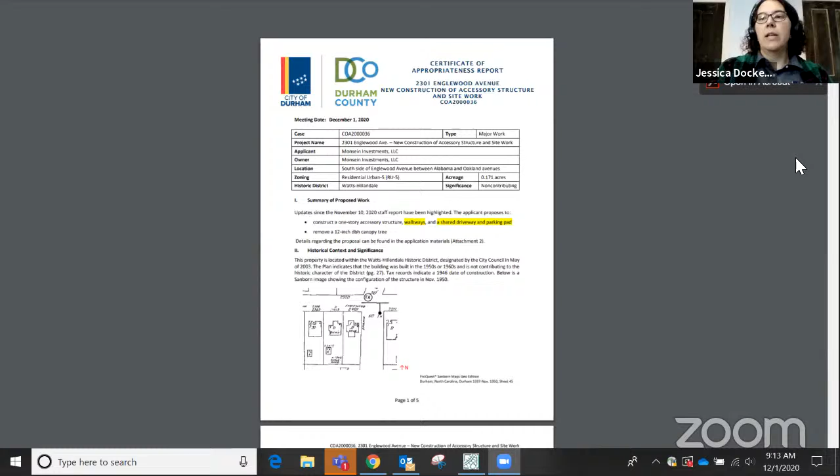And let me go ahead and share. So originally we had 2 driveways shown, and there was a question about the height difference between the original and the accessory structure buildings. So we now have 16 feet in height to the peak of the roof of the primary structure, and the accessory structure also at 16 feet to the height, the peak of the roof. And then the driveway has been altered to have 1 drive. Bear with me. So there will be 1 entrance, it will be shared by both dwellings, and these are pervious pavers in response to some concerns about the impervious surface. And I'll let the applicant add anything else.

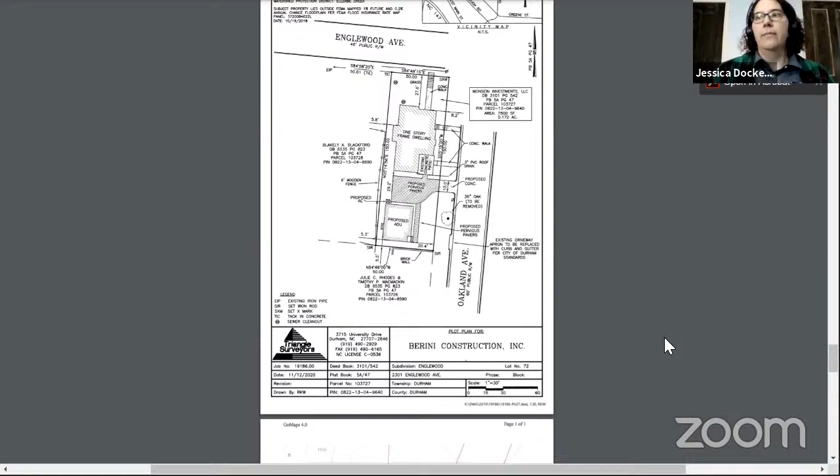This is Jeff Monsein, thank you. Yeah, so we tried to address all the concerns. We feel we lowered the roof pitch by over 3 feet, so it is now a clearly subordinate structure to the main house. That was one of the big things, and also the driveway, I think, was the other main concern. We had 2 driveway entrances, so we made 1, and then again, as Jessica stated, we were using permeable pavers to address some of the neighbors' concerns and the impervious surface question. So we feel like, with these adjustments, that hopefully the committee would approve our project.

Chair Hamilton noted they forgot to swear everybody in. It was clarified that if this is a continuation, witnesses have already been sworn in. Dawn O'Toole from the city attorney's office confirmed that for a continuation hearing, there's no need to re-swear in everyone.

Thank you, Jessica, just trying to keep things clean, appreciate it. Okay, and thank you, Mr. Monsein, for your presentation.

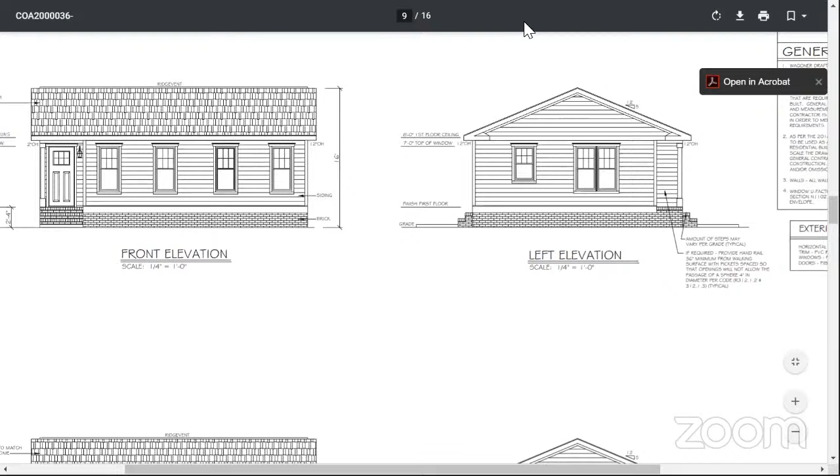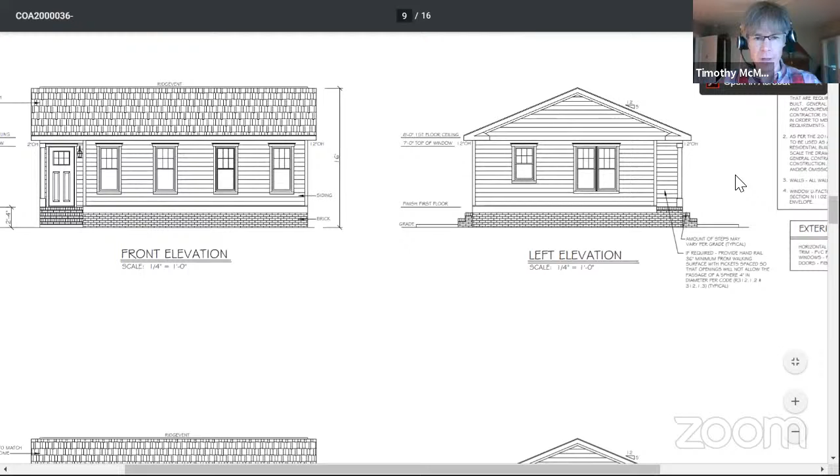I appreciate the changes in the height and in the paving. My concern is that this ADU is still very close to my side yard. Last time I showed a rule that on a corner unit, the ADU needs to be 10 feet off of the side yard or rear yard of the building. I've done some research, and that 10-foot rule did not make it into the UDO, but I'm still going to ask for additional separation here because it's a corner lot. Even though it's 5 feet off the rear of the primary structure, it's 5 feet on my side yard. My house was built in the 30s, and it's 8 feet from the house to the property line. So I'm going to ask for 8 feet separation there so the houses aren't packed in like sardines. That's all I can ask, just the separation for the comfort and aesthetics of the neighborhood.

Thank you, Mr. McMackin. Do you have any way of framing that in regards to the criteria for the Historic Preservation Commission? Nothing specific, except the character of the neighborhood.

Mr. Monsein, do you have any way you'd like to address that? Yeah, I mean, we're going to stick with the UDO and the building codes. I don't really see any options to make any further separation. We're going to do everything through the permitting office. The site, when you do these ADUs, as most of you know, the city is trying to get more density and more diversity of housing with the expanding housing choices. So when you do them, the site is already tight enough, and that's why they made the setbacks what they did. I really don't see any option of expanding from a 5-foot setback to an 8-foot setback. It won't work with pretty much any of these projects that come to the board. These sites are already tight enough. But we will do everything within the parameters of the city planning department.

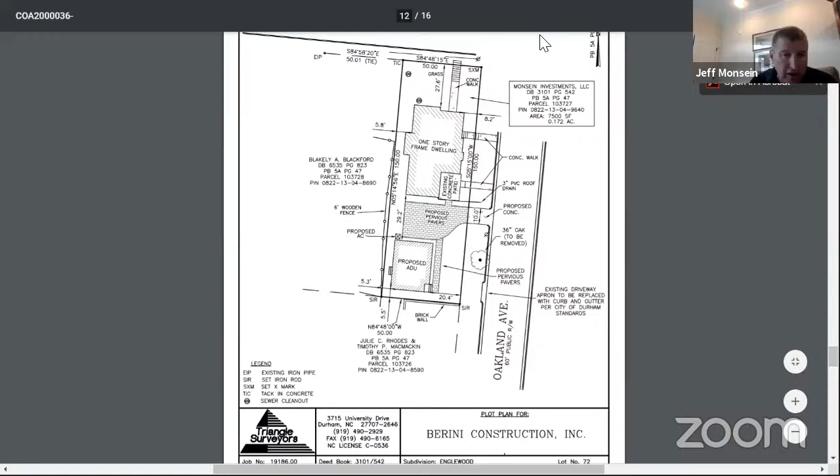Okay, thank you, Mr. Monsein. Are there any commissioners who have questions or issues they'd like to discuss with the applicant or the opponent?

Quick question. I think I'm remembering that there was going to be a tree added. Can you use the cursor on the screen that you have now to indicate where that is? JB, do I have the ability to use the cursor? Can you see my cursor here? That's the tree now, and this is the tree that will be removed, and then there was a plan to put a tree here. Let me see if I have included that final plan. It may not be here.

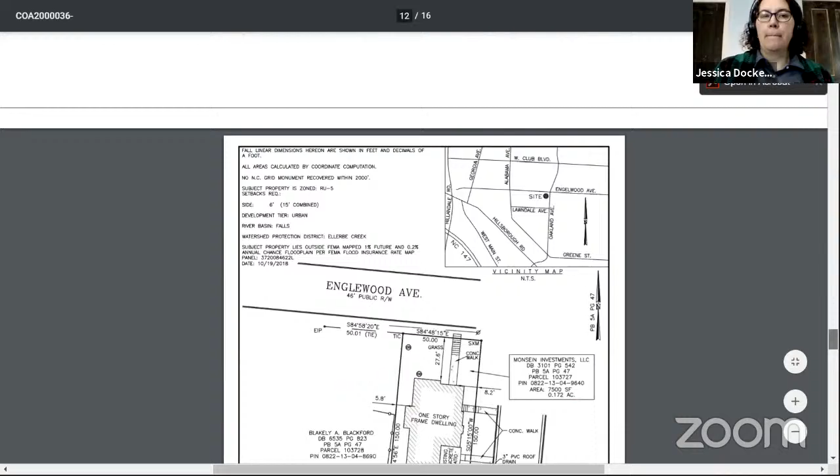Jeff, would you please tell me if I'm correct? There's one tree planned here. That is correct. Thank you, JB. So this one would be removed, and an additional tree would be added here. The tree that would be removed is under the power line and has been severely pruned, so we're suggesting placement of a tree outside the right of way, not directly under the power line, but instead adjacent to it. Thank you.

Are there any other commissioners with questions? Vice Chair Bouchard, just a quick point of clarification. The initial application from last month indicated that the primary structure is 1 story and 12 feet in height, and the revised application for today states that the primary structure is 1 story and 16 feet in height. Mr. Monsein, can you explain the discrepancy between those two measurements?

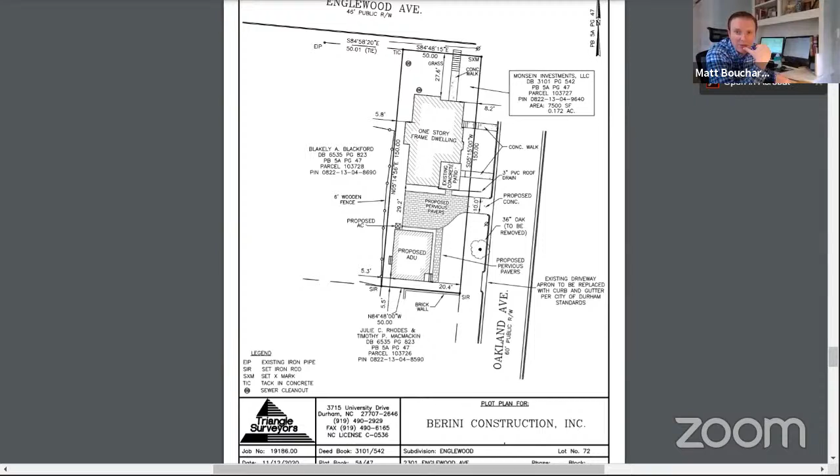Well, we measured the first one to the soffit. JB, you may want to chime in, but then we measured the 16 feet to the tip of the gable, the peak of the gable. Yeah, no, that's it, to the peak. So at the last meeting, there was a suggestion for consistency in the way we're using measurements. So now the proposed ADU height has been reduced to 16, and we're using a similar measurement to the peak of the main house, so it is at 16. Wonderful, thank you.

Are there any other questions from commissioners for the applicant or the opponent?

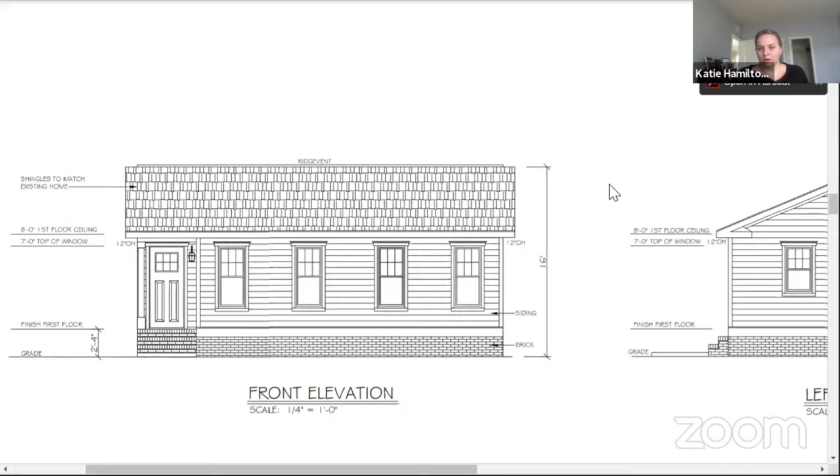Okay, hearing none, we will close the public hearing. And then if the commissioners have issues they'd like to discuss amongst themselves, please do so.

Katie, I have a couple comments. First of all, my understanding is that we're supposed to gauge how these additions to the neighborhood affect other structures in the vicinity. And clearly the neighbor brings up a good point. I'm not sure what we can do in this case, but I think this is something we need to look at.

And the second comment I have is this new ADU business, particularly in these historic neighborhoods, is something we're going to have to deal with more and more. Mr. Monzine has indicated this is going to be a focus of some of the stuff he's doing going forward, and I'm sure there'll be others. I'm not commenting on whether this is a good or bad thing, just that we are going to probably approve a structure exactly like a structure we approved last month.

And another part of the criteria is these structures are to be compatible with the architectural style of the primary structure. And you can't tell me that identical structures haven't been thought about being incompatible with these houses. So if we're going to continue to look at these things and their impact on these historic districts, we cannot rubber stamp the same house over and over again. I would have a very hard time supporting doing so, and just kind of want to put that out there.

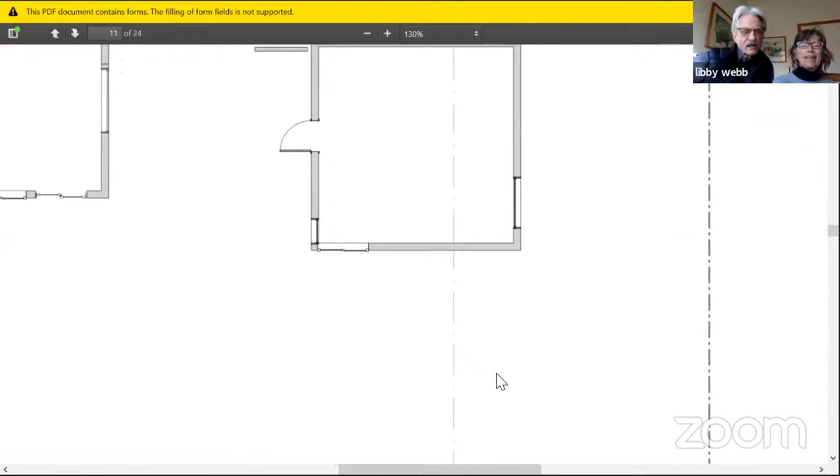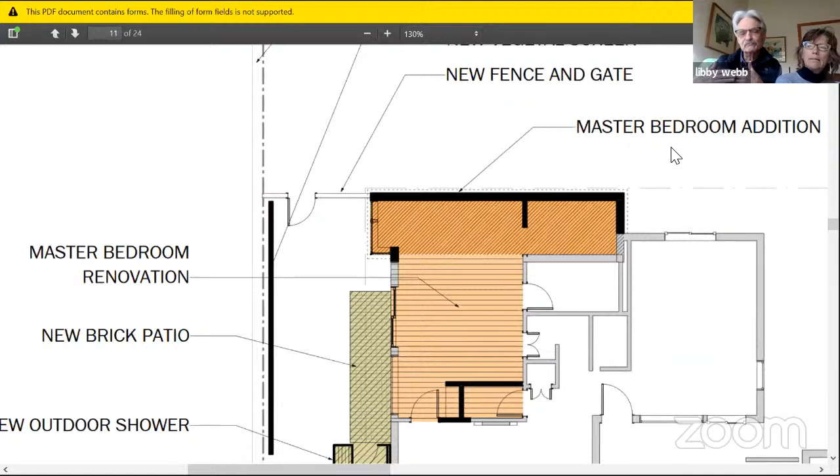The structure is clapboard, and the structure actually won't change very much from the Cobb side of the house. It will move towards Cobb Street an additional 4 feet. The entire addition is actually about 25 feet by 6 feet, but it's in an area that's offset on the Cobb side.

Front of the house. If you could go back to those pictures, Carla, of the North side. This is the south side of the house. This is the north side of the house, and you'll see, if you can, this is the east side. Carla, if you can go back a couple to that Cobb side front. So this is actually a very minimal addition. Again, it's a non-contributing structure. It will not change. There it is.

Let me talk to this one. You'll see on the right side, this left side is 2 feet in front of that right side of the structure now. This right side of the structure will come out another 6 feet, but only 4 feet in front of the left side towards Cobb Street. It will be about 1.5 stories high, and there will be 3 small windows up about 8 feet on that north side of the house. And then to the right of that will be a gate, because there'll be a small patio coming off this master bedroom. So the entire addition really is just 150 square feet, about 6 by 25.

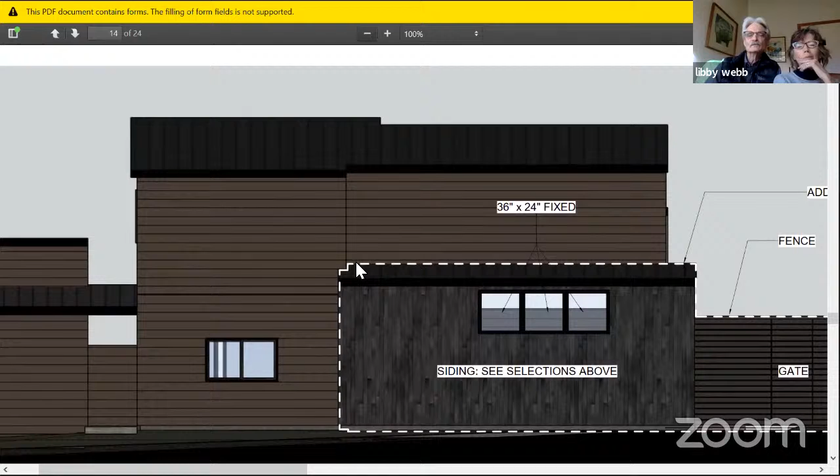So yeah, I think we're happy to answer questions since we're new to this process, and we don't have somebody representing us who is familiar. We'd be happy to answer y'all's questions. Great, thank you so much for your presentation.

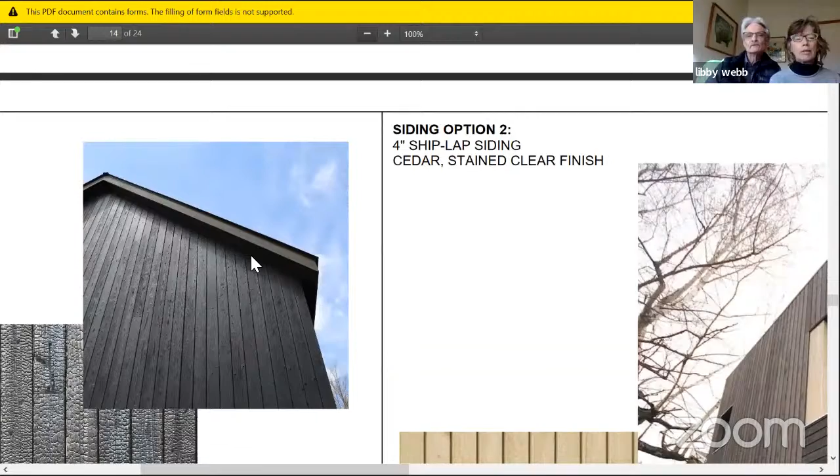Yeah, we haven't, and happy to take your feedback about that, if there are any that you're troubled by.

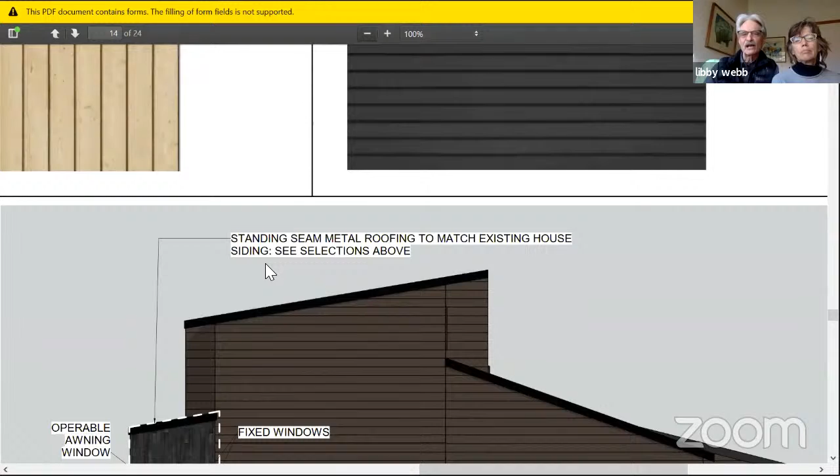Well, and I guess our concern too is, what will you accept? So we would actually like to make a little bit of a distinction architecturally on that new addition, but it could be exactly duplicating the existing structure now so that it's hardly noticeable. We think it might be interesting to have it that material be a little bit different and contrasting to the present clapboard siding.

Thanks for that. I don't personally have an opinion. I certainly defer to the design professionals here, but just curious. Andy, do you have an opinion?

I know I like the contrast, but... yeah, our architect that we're working with, Notch Design, is suggesting a little slight contrast.

We actually think it would improve the look from Cobb Street, because what we have now is pretty much a box that faces the street.

Yeah, this is Andy. I don't have any opinion one way or another, as long as it's keeping in the criteria in terms of the materials and what you can do on a non-contributing structure.

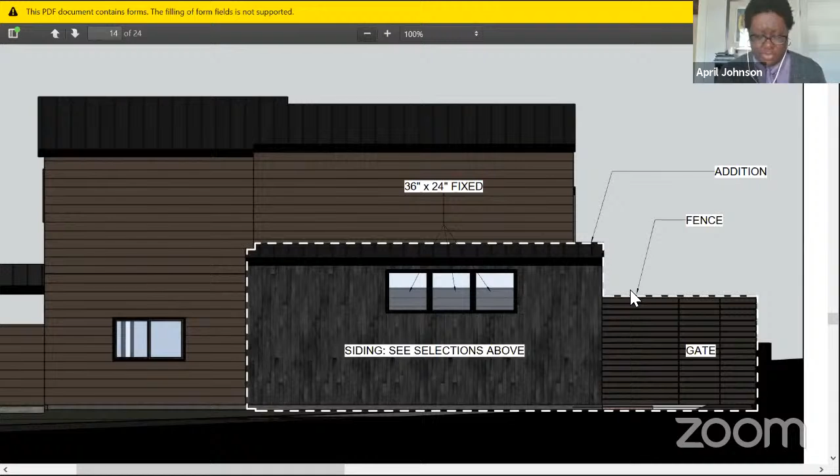Yeah, I don't have much of an opinion on either, as long as it meets the guidelines.

But typically in historic structures, we do prefer a slight difference so that you can always tell the difference between the original historic structure and the addition. I think it's just always a good way to continue telling the story of a building, even though this is not contributing. It kind of documents changes.

I think April makes a great point. Just because this building is non-contributing now, hopefully someday it will rise to that level, and being able to tell the story of the building by some of its finishes, I think that's a great point.

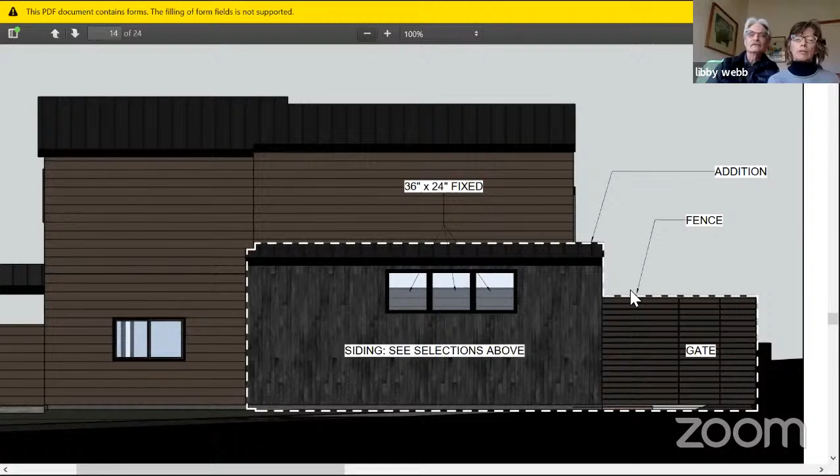Thank you. Were there any other questions for the applicants or the staff? All right, hearing none, is there any discussion amongst the commissioners related to this case? All right, hearing none, I am willing to entertain a motion at this time.

I'll make the motion. Thanks, Don. Durham Historic Preservation Commission finds that in case COA 2000070 Cobb Street, addition and site work, the applicant is proposing an addition and site work on a non-contributing structure. The street-facing addition will be constructed with unpainted and treated horizontal vertical shiplap siding.

Fenestration on the addition will include a sliding glass door and frameless corner window. A brick patio measuring 4 by 14.5 feet will border the home's west side elevation. A painted wood fence measuring 7 feet in height with matching gate and vegetated screen will border the patio.

An HVAC unit currently located along the street-facing elevation will be relocated along the same elevation, reusing the existing wood screening structure. And electrical meters will be moved from the non-street-facing side of the house to the side of the screening structure facing the street.

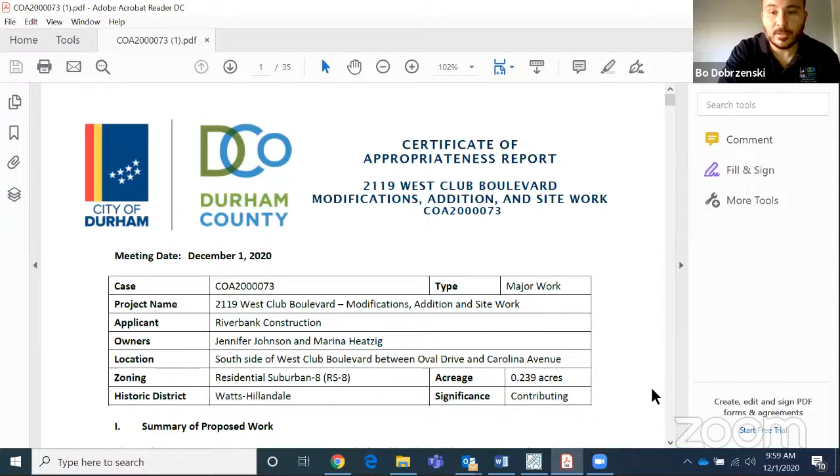All right, welcome everyone. The applicant is proposing an addition to a contributing structure in the Watts-Hillandale Local Historic District, at 2119 West Club Boulevard. Also included in this proposal is a deck off the rear. There's some modifications to what is an existing addition off the rear of the structure, including a new door and a landing for the door, and the removal of existing door, replacing it with windows.

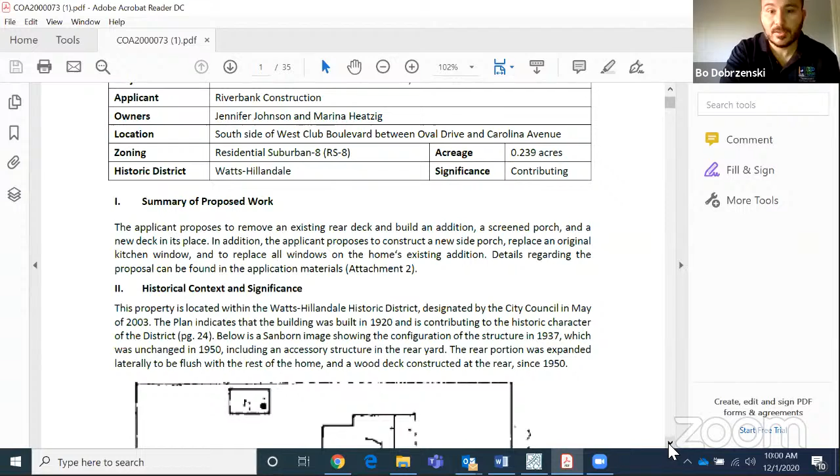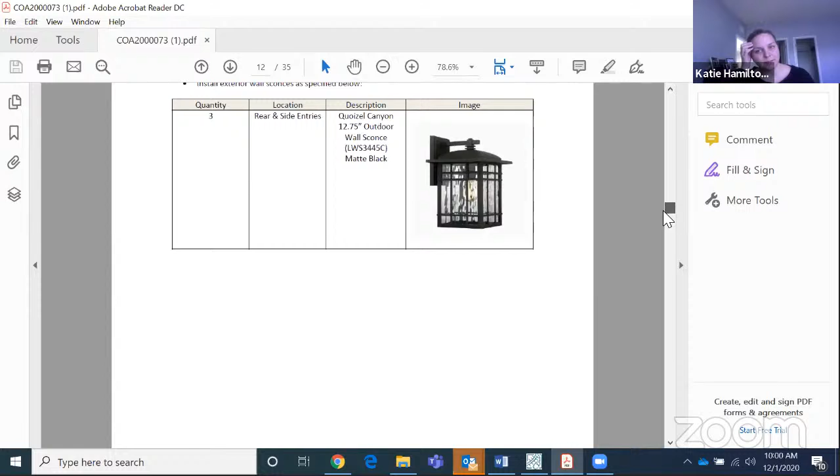Sorry about that. At this time, I'll let the applicant speak, and I can scroll to any portions of the application to assist them. Am I able to share my screen? It might be easier. No, I think the city staff needs to maintain control over what is displayed on the city's virtual hearings. Bo, if you just want to stop on the plans there, that'd be great. Sure, maybe the proposed elevations.

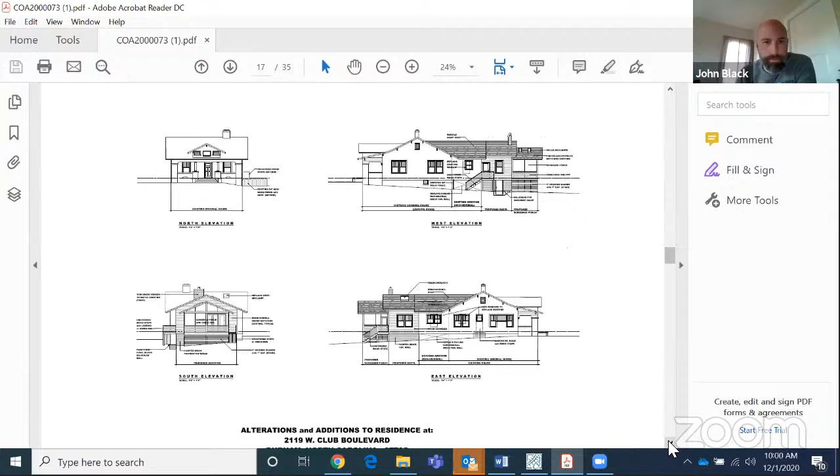All right, so this is John Black with Riverbank Construction speaking on behalf of the owners of this property. The addition that's being proposed on this structure, you can see with the hatched portion of the elevation drawings, it's basically an extension of a gable on the back of the house. We're proposing to continue the same form of the roof structure and actually rebuild a portion of the rear roof to basically correct

an old roof that was modified from an old addition. You can see we're planning to continue the same material on the siding, the wooden shakes, the same brick foundation that would just be painted to match the existing. And you can see we are proposing to remove some of the existing windows and a door, mostly for practical reasons for what's going on the inside of the house due to location of kitchen and bathrooms. And then also we're removing the door on the east elevation and putting one on the west elevation, again for practical reasons, mostly because the driveway is on the west side of the house. So it makes more sense to have one over there.

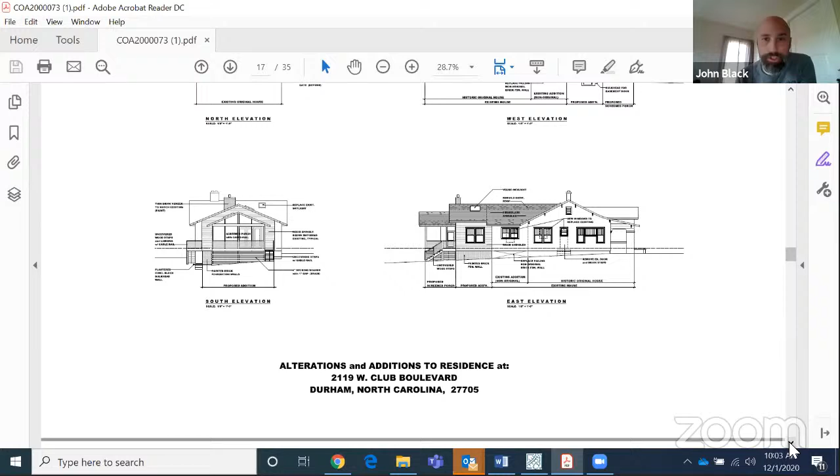You can see that we've tried to show the addition as subordinate to the main house in that it is under the primary gable at the front of the house. It does not raise above that height. It's also stepped in from the east and west sides of the house. And then the screen porch at the very back is even shorter than the addition to the house, and again, stepped in on each side to show it as subordinate. With that, I'm open to any questions or comments.

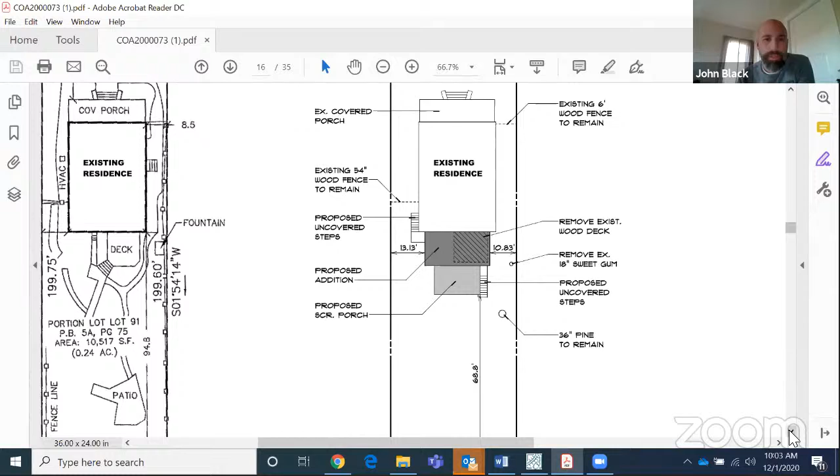Thank you, Mr. Black. Did any of the commissioners have questions for Mr. Black in regards to this application? Have any of the architectural components that you're taking out, windows, doors, have you looked at reusing them somewhere in the construction? We have not proposed to reuse them simply because, quite honestly, you can get a higher quality product, finish out of a new window, better seal and all that. So we have not proposed to reuse any of them. And some of the new windows that we need are smaller in size, so they could not be reused. So our thought was to make all of the addition have the same new windows rather than mix and match old and new.

And have you considered other ways to tie the addition in with the existing house besides just using the shakes? Materials, yeah, maybe brackets or other visuals that just... We certainly could. We certainly could repeat that. Those brackets, I believe they're visible on the main gable on the east and west elevation. Bo, if you show those.

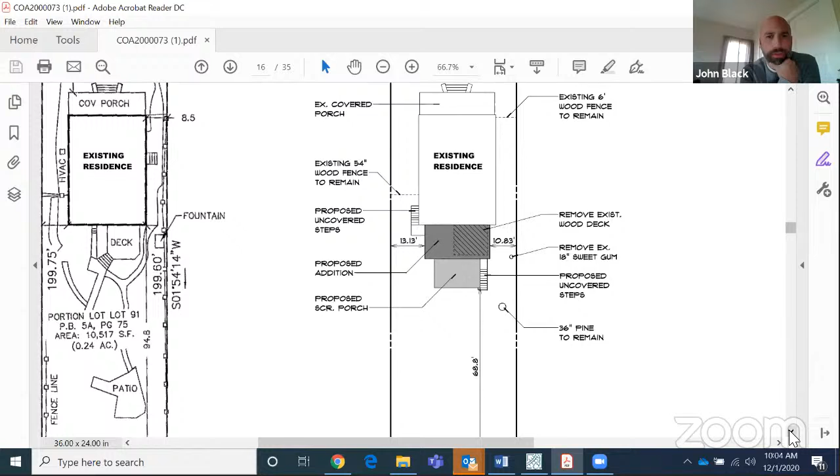Yeah, there you go. And even on that front gable, we could repeat those on the back, on the rear gable. It's facing the backyard, so it would never be seen from the street, but we could certainly introduce those.

I'm not sure that makes a lot of sense, but I'm just wondering what your design process was, because the porch looks very contemporary as opposed to the rest of the house. I'm not sure if that's good or bad, but it just is very different. And there don't seem to be any design cues that tie it to the rest of the structure.

You're correct, it's merely the form underneath the roof gable. The homeowners desired to have a more contemporary look, and since it was in the back of the house, we tried to scale it down, pull it in from the sides so it'd be less visible from the front. Other than that, other than the form and the materials, I've got nothing else. John, thanks.

It's clear your care with the form makes a lot of sense. And Tad, thanks for bringing up the porch. I am looking at the local review criteria on decks and porches, which says design decks and screened-in porches to be compatible with the historic structure in style, material, scale, and proportion. So yep, particularly the cable railing feels out of place to me. John, I'd love your feedback on that.

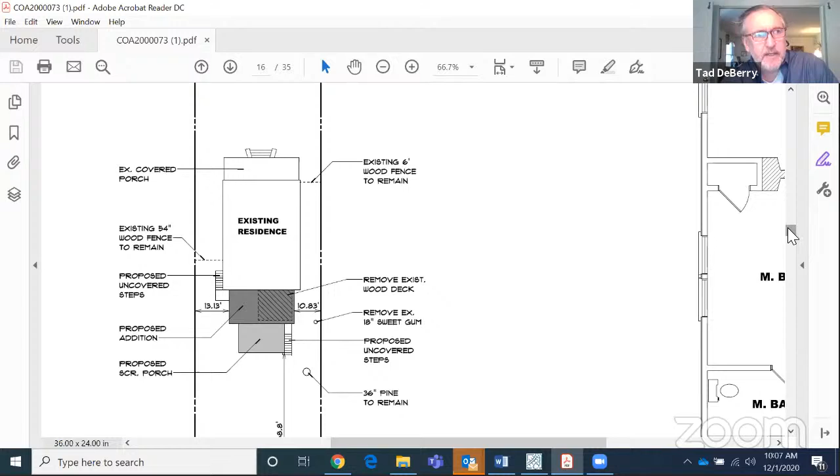Okay, thanks for that info. I hear you that you're caught between the homeowners and the criteria. Alright, I have one other comment, something we've discussed at this committee in the past: wood steps and stoops on houses like these where typically they may have been brick. Again, these are on the rear and side, not really visible, but I'd love to hear what the other commissioners think and what the designers think.

Andy, do you have strong opinions on that? Or April, or anyone else?

I think as long as the material is approvable, it is in the rear. We do sometimes see wood steps, but I think that's just at the discretion of the property owner, as long as the material is acceptable according to the guidelines. I see all kinds of steps: concrete, wood, brick.

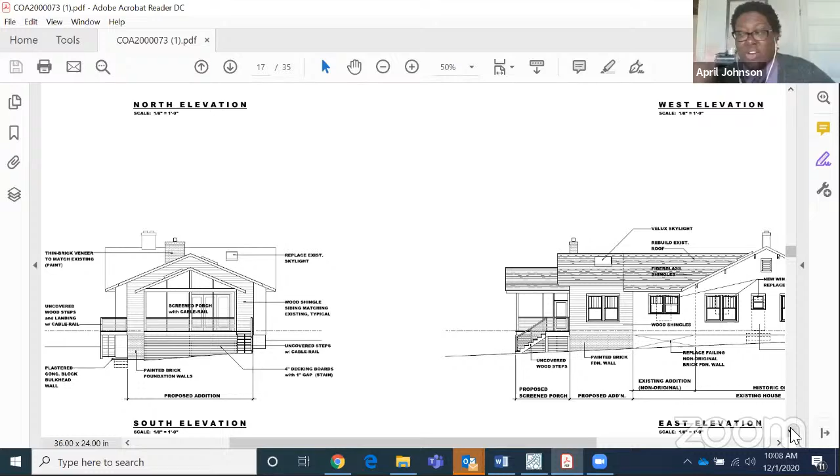But I'm not as concerned about the less visible areas than I am about the more visible areas. Yeah, I agree with April. I tend to see wood steps throughout the districts too.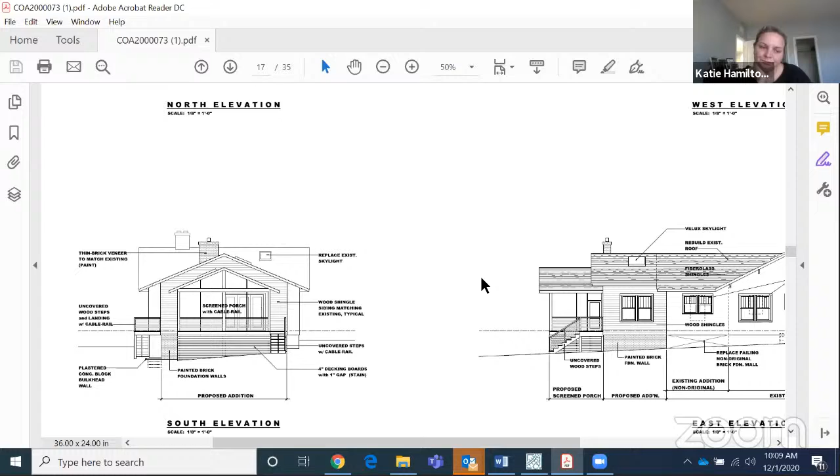Okay, and then we also have Nancy McLaughlin here to speak. Yes, can you hear me? Yes, ma'am. Okay, I'm calling in from my cell phone, so you won't be able to see me. My name is Nancy McLaughlin, and I live at 1116 Oval Drive. And because I'm on Oval and they're on Club, my rear yard is adjacent to their rear yard.

I first want to comment - I signed up to speak before I saw the details of the plans, and I didn't know how big and extensive the additions would be. I only was able to see the plans this morning when I got back from my vacation trip, my holiday trip. First of all, people keep saying it's in the rear and it won't be visible, but this back porch is visible from Oval Drive and from Oval Park.

And I think that should be taken into consideration. They may not be able to see the steps, but they may be able to see the railing from another street. So just because it's in the rear of the property does not mean it won't be seen. It will be seen by me and by the other neighbors who have adjacent properties. So I don't know how the developer thought about that, the visibility from Oval Drive rather than the visibility from the front.

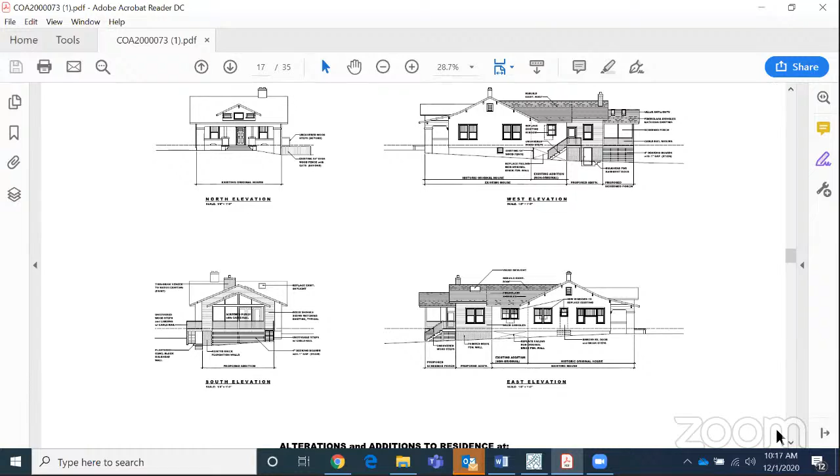Okay, thank you. And then my second concern was the design of the rear porch, taking into consideration that it can be seen from a street, even though it isn't from the street in front of the house.

Yeah, we will look at Oval Drive's street view to get a better understanding of what is and is not visible from that street.

Are we in commission discussion yet or still? No, we're not. If you have questions for either the applicant or the opponent. Well, okay, no, we can do this in discussion.

Katie, I do have one for John, this is Andy Goolsby. With regards to expanding the structure, your elevations noted an existing historic house where there was an addition, an early addition, and then your new construction. Can you speak to the era of the first addition? Is that part of the historic character of the house, or is it something from the 90s made to look like the house?

I can only speculate, this is John Black again. I can only speculate that addition was very old.

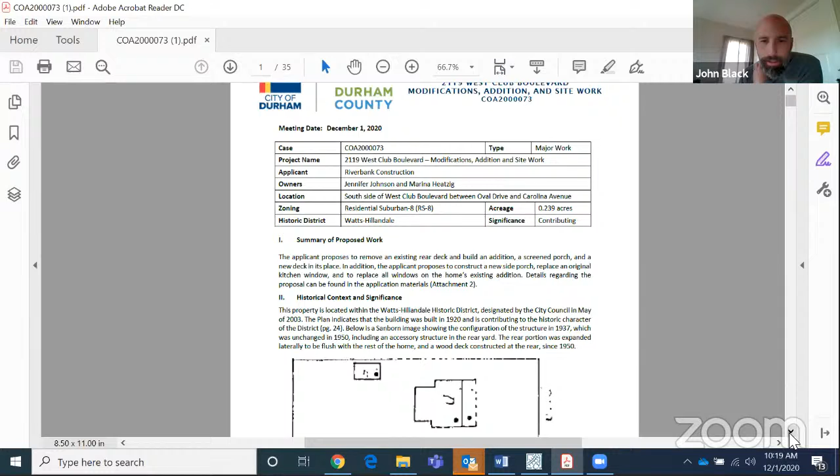Bo, I believe you have the Sanborn map available, is that correct? So that shows the existing structure with the rear portion stepped in from the other sides of the house. That's not the way it exists today; it's a rectangular box all the way around. So at some point, somebody added on in those little corners so that it's just a flush box. And the materials match right now, it's the same shake siding, it's a brick infill foundation. So it's really hard to say when that was done, but it was after this map was done, which is 1937.

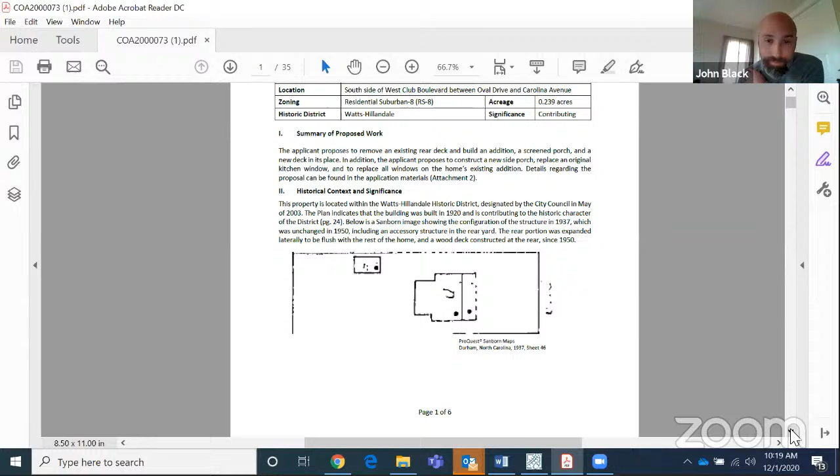It seems old. Mm-hmm. No, they did a good job of it, right? So. Yeah.

Were there any other questions for the applicant or opponent? Yeah, this is Vice Chair Bouchard, trying to dig down a little bit more on Tad's concern about the windows. Mr. Black, if you could help me understand, which windows on the existing elevations are proposed to be removed? Because I don't know if I'm confusing myself.

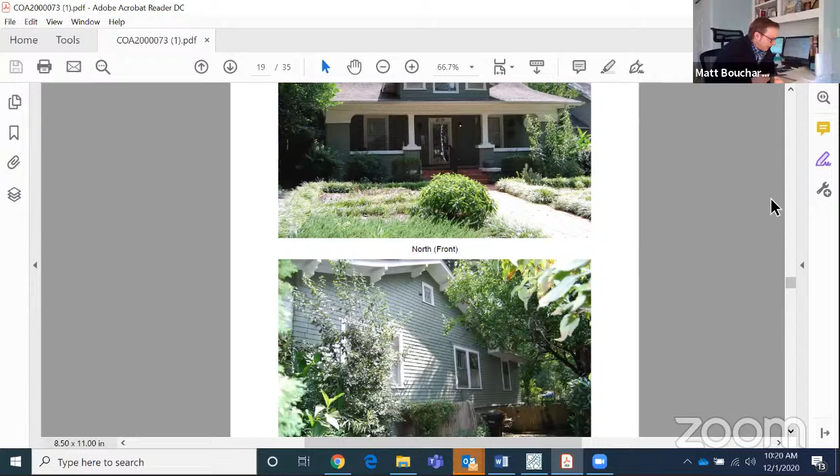Sure. The proposed west elevation suggests an existing window will be replaced. I don't see in the existing elevations that window being called out as replaced like it does in the existing east elevation. So I'm just trying to get a sense for exactly how many windows on each of the west and east elevations are proposed for removal. Sure.

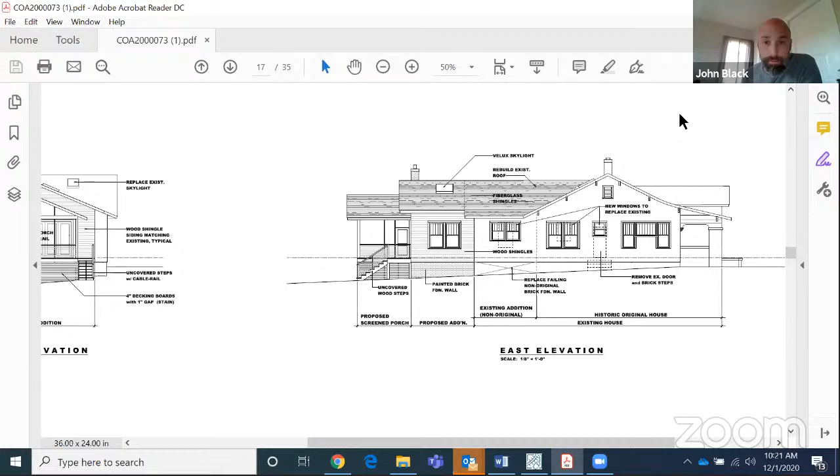Bo, I think the proposed elevations are going to be more helpful. There you go. Okay. Looking at the east elevation first, the dotted lines are the existing windows and door. There's the door directly underneath that primary gable. We're proposing to remove that since that's now becoming a bathroom on the inside, and there's a smaller window proposed there. There's an existing single to the left of that we're proposing to replace with a larger twin unit, and those have to be larger because that's becoming what could be a bedroom, a guest room.

And need to be larger for egress purposes? Egress, yeah. Okay. The existing single beyond that, we're proposing to replace with a shorter twin unit, simply because that's becoming kitchen and we need countertops to go on that wall. So shorter windows are practically required. So those are what's being proposed to be replaced there.

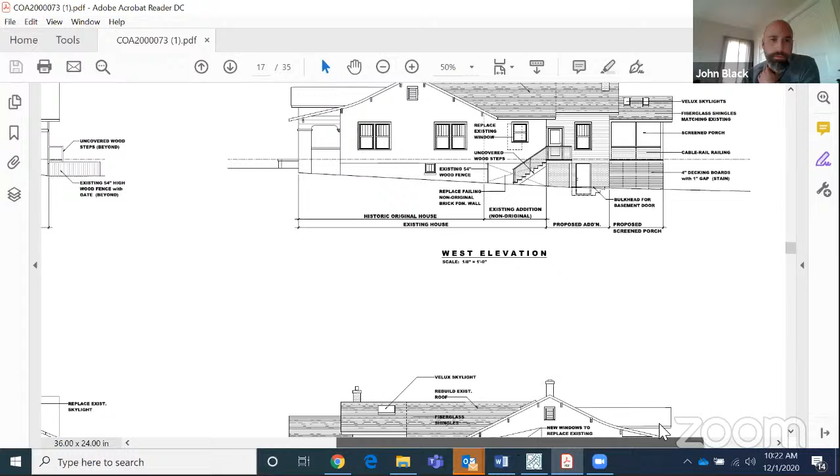If you go to the west elevation, Bo. I went the easy way. There's a single double hung right there that we're proposing to replace with a shorter double hung, again because it's becoming a bathroom, so functionally it's better to have more privacy there, especially with the new entry stair. And then the windows on the entire front half of the house are staying the same. On the rear elevation, I guess you could go to either the existing elevation or the photos.

That works. So all of those we're proposing to remove because obviously the interior space is expanding. Okay.

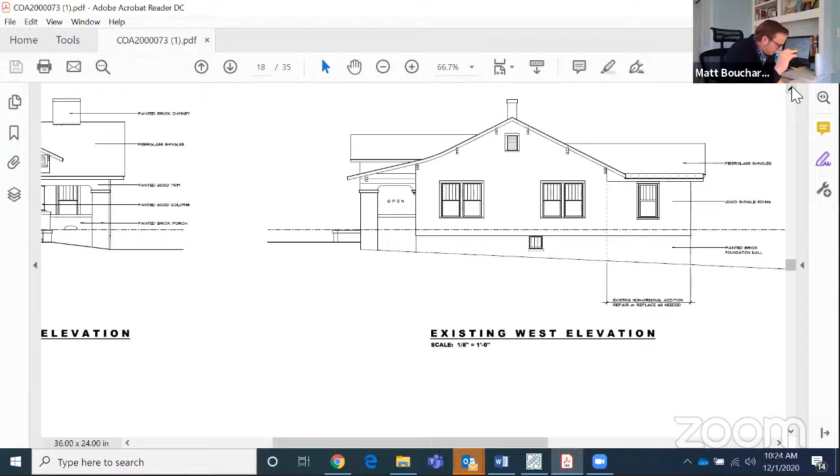So it looks like there are, I might be miscounting here, 1, but 2, 3, 4, 5, maybe seven or 8. I'm just curious, and I can't tell what the sizes are of these 5/1 windows are, but based on the west elevation, it looks like the size of window to be replaced is the same as one of the windows to be replaced on the east elevation, the one furthest towards the backyard, as well as the same size as one of the windows proposed to be removed from the south elevation. Is that correct? Are those all the same size?

The window that is proposed to be removed from the east side or the west side, right there, is very similar in size to the new one being proposed to the right of the entry door. So that's a potential for sliding that down, assuming the old one can provide egress for that bedroom.

Getting to the bottom line of the reason for these questions, without having specific proportions in these plan sheets, I'm just wondering if there are enough of these 5/1 windows to serve as the windows used on both the west and east elevations for the enclosure.

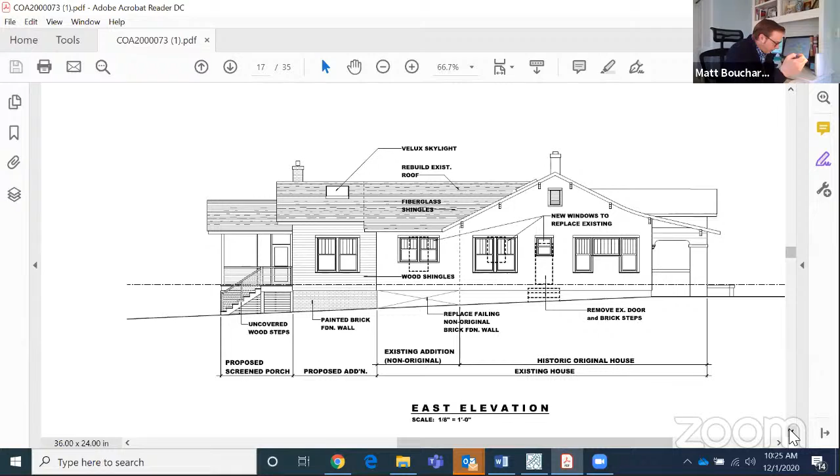The proposed addition - I would add to that, keeping in mind the overall rhythm and proportion of those elevations and not piecemealing that together. Looks like some are shorter than others, so maybe there are certain ones that make sense to reuse. That's what I'm driving at - are there opportunities here to reuse windows being removed from certain portions of this house? It would give me a greater degree of confidence in voting to approve this proposal.

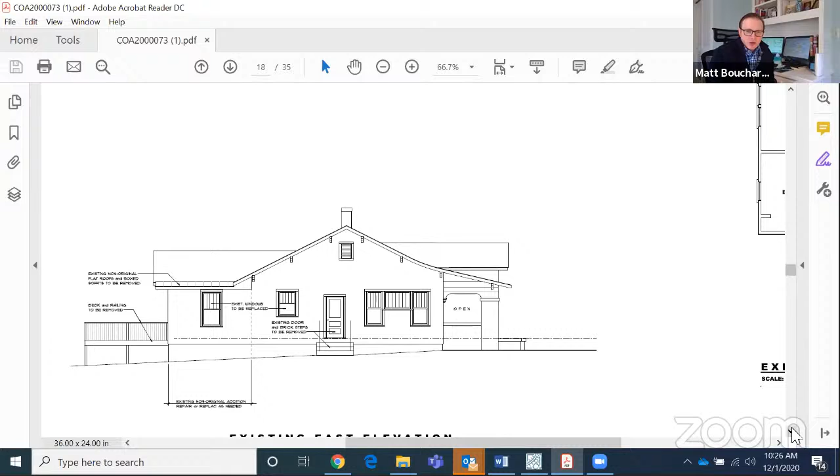We've been pretty mindful of original openings and the requirements governing original window openings in the past, and ideally I'd like to honor that if it's possible.

I don't believe any of the shorter existing windows can be reused, but that taller one on the east elevation - yep - and the taller one on the west elevation, they could be reused in the addition. What about the taller one on the south elevation? I'm just wondering if those three windows are the same size. Sure, that one right there. Yep, so they're all singles. Bo, could you go back to the proposed elevations?

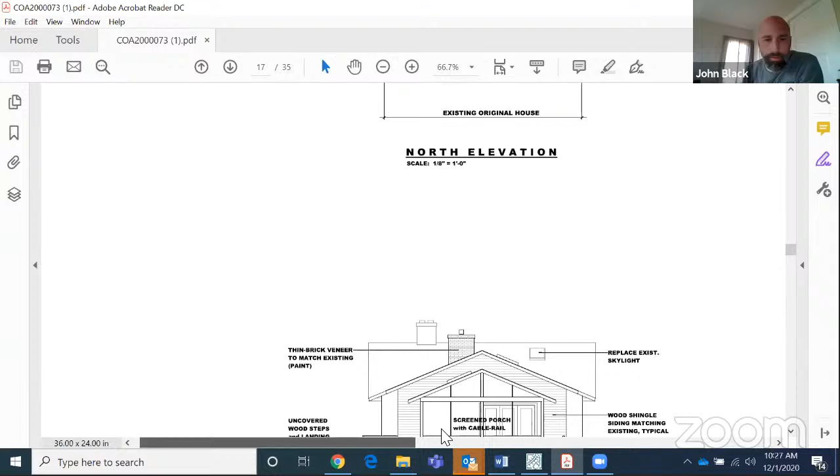Could that small one on the south be used in one of your bathroom applications? My only concern with doing that is that at least the master is in the shower, and we had actually hoped to install an all fiberglass window - not just wood clad, but fiberglass through and through - just to protect it from moisture and rot. That would be my only concern there.

But so we've got a couple twin window units. So we could put two of the existing taller ones on this elevation to form one of those twin units, and then that third one could probably go on the west elevation. If you look at the west, yep, right back there. Exactly, yep, so we could do that.

Jonathan, may I ask a question? This is to John and Bo - do you think, in your professional opinions, it would be appropriate or not to put a wood window in a bathroom, in a shower, sorry?

Well, I have a historic house, I have a wood window in my bathroom. But it's old wood though, so maybe that's a difference. I would like to hear their professional opinion on this, because not everything that was built in the past meets today's standards. So we need to see that the standards also adhere.

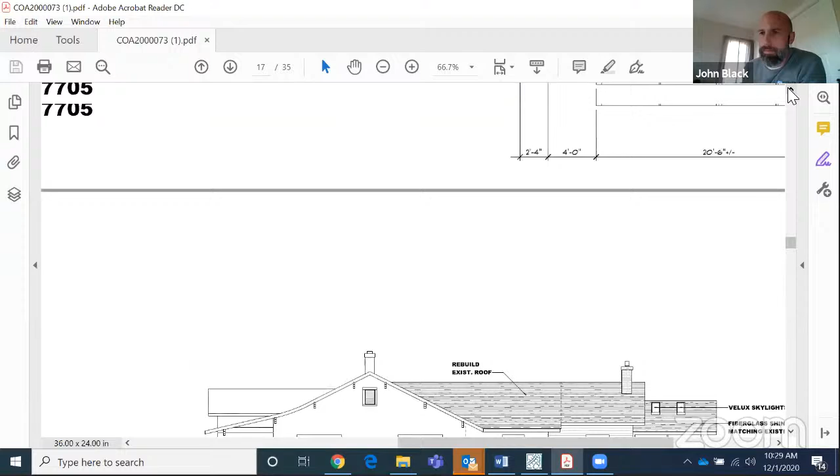Actually, Bo, if you go to the proposed floor plan, I think it's on the front page of the plans - you'll see that the showers are on both of the exterior walls and both of them have the window.

Just out of practice, we try to avoid putting wood windows in showers because over the longevity of it, it's not a good idea. As builders, we don't want to be called back several years down the road - 'hey, my window's rotting,' yeah, that's because we put wood in your shower. Given the height of the existing window, I could understand if it were a shorter, squattier window we could push up higher and get out of the flow of water or the splash zone in the shower. But given the size of even the smaller existing windows, I would feel concerned putting them actually in the shower.

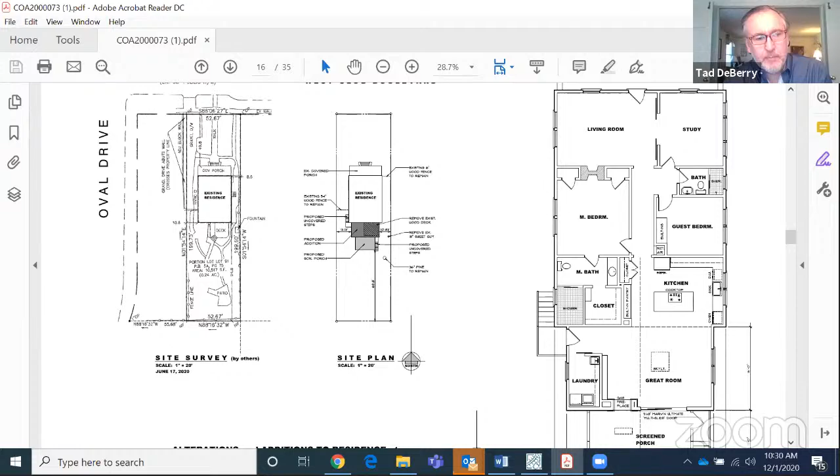I think if you could reuse the majority of those windows, I certainly could support using something appropriate in the bathrooms.

This is John Black again. So for the 3 taller existing windows, I think we could put one in the laundry room and form the other 2 as a twin in the great room. Because in the great room, no matter the size of those existing windows, there's no egress requirement since it's not a bedroom. So the great room and laundry room are good opportunities to reuse those 3 taller existing windows.

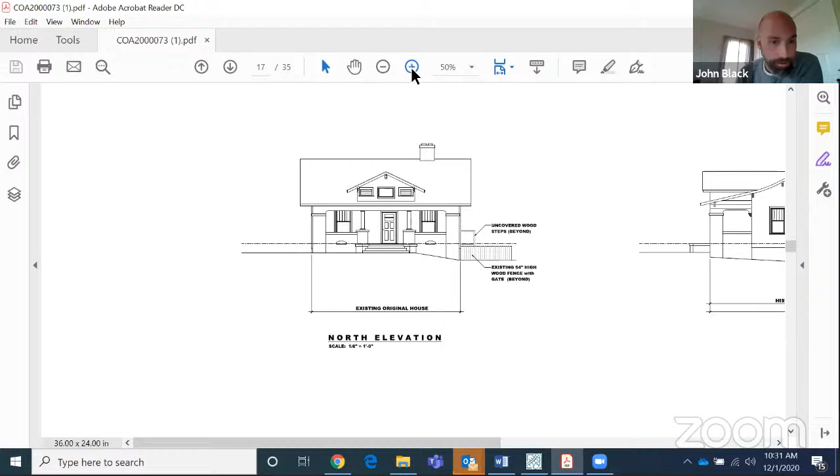Can you show me, Mr. Black, where the laundry room is on the elevation? Current elevation? You're looking at the window to the right of the side entry. Okay, so the addition, the proposed addition? Correct, correct. Okay, thank you.

Is there any other questions from commissioners for the applicant or the opponent? All right, is there any other discussion? With that, we can close the public hearing. Is there any other discussion amongst commissioners regarding the criteria in this application?

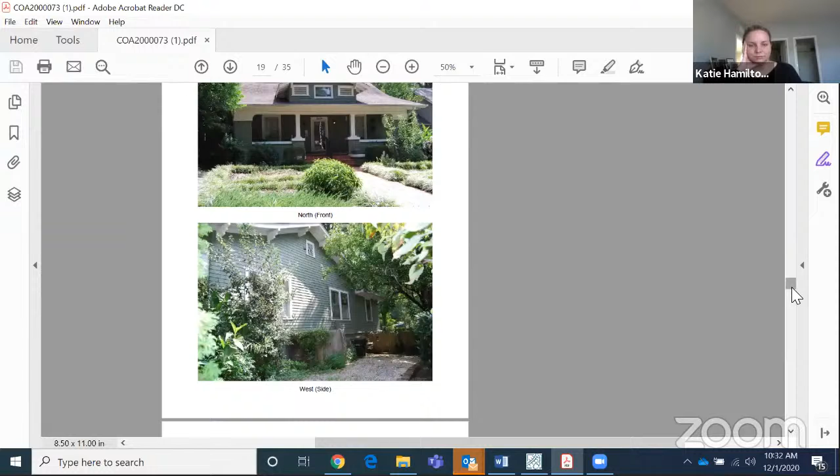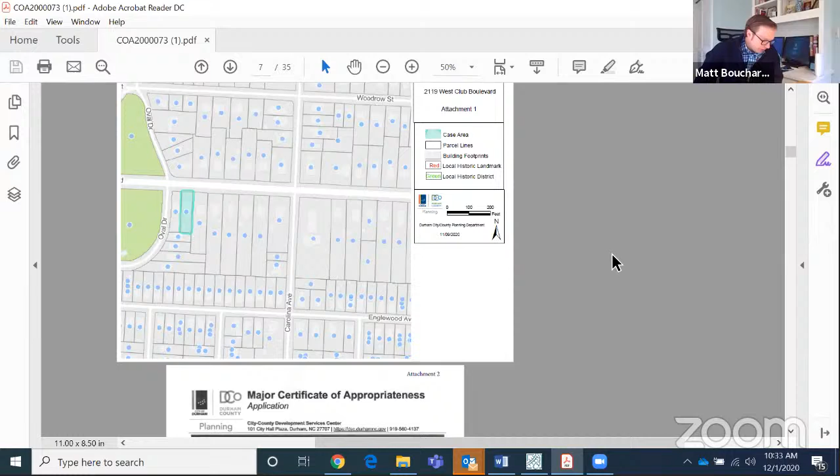Vice Chair Bouchard: I think it's pretty obvious the concern I have. What I am going to suggest, and I'd like some feedback on, is modifying the bullet dealing with original windows, if and when we get to the proposed motion, to require that the 3 taller existing 5/1 double hung windows slated to be removed will be reused, with 2 of the windows placed on the east elevation of the proposed addition, and the 3rd on the west elevation of the proposed addition.

I wanted to see what folks' reaction to that was, and then the question becomes the smaller windows. Do we want to require the applicant, if they're willing to do it, to place those smaller 5/1 windows somewhere else?

So I am in agreement on the larger windows. I do worry about, if we just start having them stick every single window on the back of it, whether or not that'll work against the rhythm that we see.

Because are you asking them to add additional windows on the rear with those smaller ones? Is that your thought, Matt, when you say that?

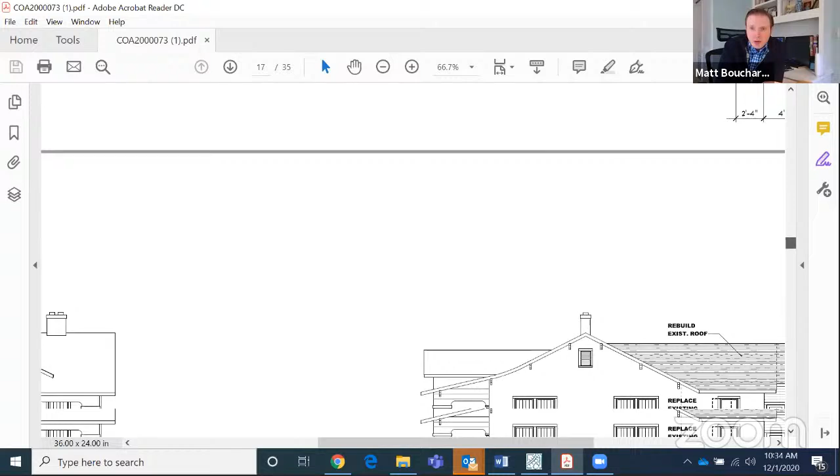No, it isn't. I guess my thought was, I tracked the larger window issue, but I haven't done as good a job tracking the smaller window issue. Are there places where those smaller windows are slated to be incorporated into the changed work, such that if there already is a smaller window slated for removal, it could be removed and slotted into where one is being planned? If the answer to that is no, then especially given the limitations involved in the bathroom, I get that. But...

Can we bring John back to answer if the 2 smaller ones could be paired over the kitchen counter?

I want to have a reservation here, because I also would like Don's opinion, but although I agree with the intent and the need to use the old windows, or the preference to use the old windows, the requirement I don't think is in our purview. I feel to require it, if the applicant would like to do that, and when we could add it to the motion, I'm fully supportive, and I would recommend it. I would be thankful if it would happen, but to require it, I'm not sure that is in our purview.

Well, we are required to abide by the criterion to retain and repair original windows. Window components may be consolidated and used in the most prominent location. And it seems to me that the best way of accomplishing that, if windows slated for removal are the same size and style as windows planned to be incorporated into the proposed addition or other portions of the work, we honor that criterion best by approving a COA that...

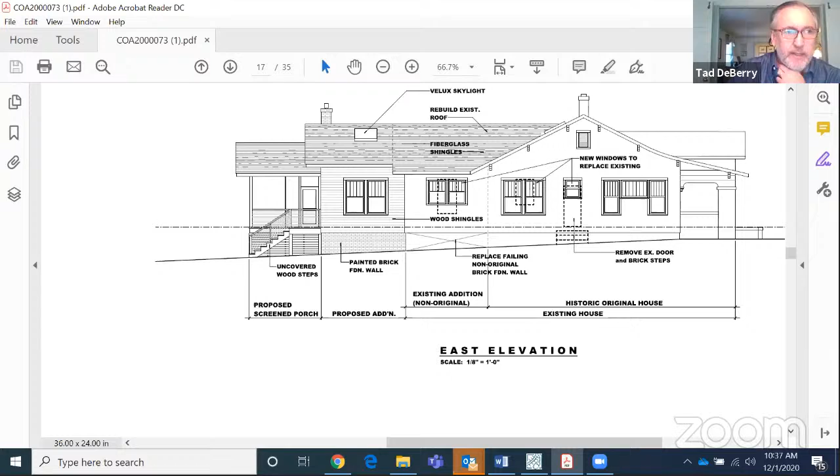I want to say I agree with you too, Matt, and I'd like to see their windows reused. According to the criteria, it seemed a little unsettling that there was no plan for the windows. I wanted to ask John Black what the conditions of each window, pairs and singles, that will be removed - are they in proper condition to be reinstalled elsewhere and retrofitted for modernity?

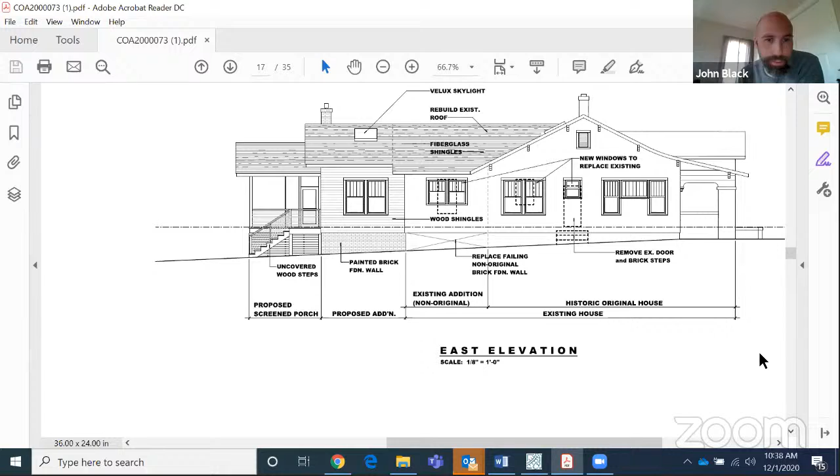This is John Black. I don't see any reason why they couldn't be reused. They've been fairly well protected with storm windows. Without taking them out and seeing if anything is malfunctioning within the walls, I can't say for certain, but I don't see any reason why they could not be reused. Anything can be fixed.

Okay, so I just wanted to clarify that aspect. If there is an issue with the windows while you take them off, that's a minor COA, and that's something staff can handle. But if you say you're using them and then something happens, there's a process for that.

This is John Black again - we're certainly willing to try to reuse anything we can. I do agree that the larger ones present the best opportunity for reuse. The smaller ones are different sizes, and as I've mentioned, there are practical concerns in the showers. Also at the kitchen, we would prefer something that functions a little better, like a casement window, simply for practical reasons. So I'd be more than willing to reuse the taller windows, but the smaller ones I'd be less excited about trying to reuse.

Mr. Black, one last question about the smaller windows - what is the use of the space on the east elevation where the door is going to be removed and a window put in its place, one of the smaller ones? That's one of the showers. And the double smaller windows? That's above the kitchen sink.

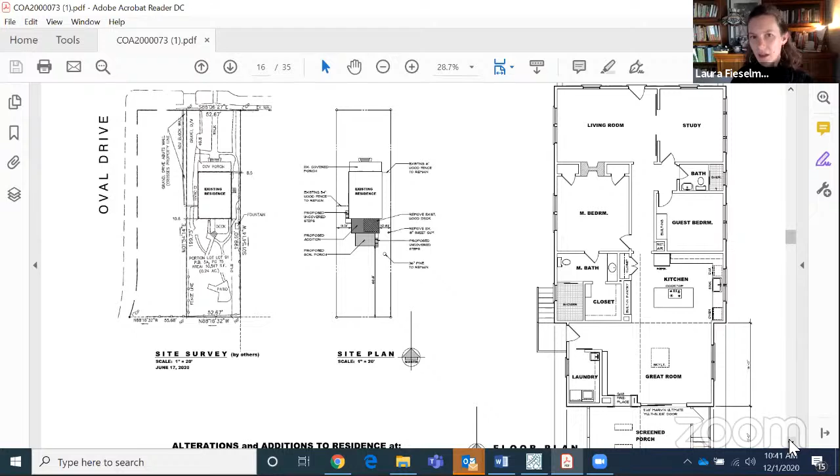Another question on reusing the tall windows - we've identified 3 tall windows coming out, and in the rear addition, 3 tall windows needed: 1 in the laundry room and 2 in the great room. There's also 2 tall windows needed for the guest bedroom, which in the current conversation would be new and operable for egress.

My concern with trying to use the old ones there would be egress. It may look better historically since that's the older part of the house, but I'm just concerned about egress. That makes sense - I'm okay with where we've landed here: reusing the 3 tall ones on the rear addition, and the other smaller ones being new, given the uses of the space and the differing sizes of the existing windows.

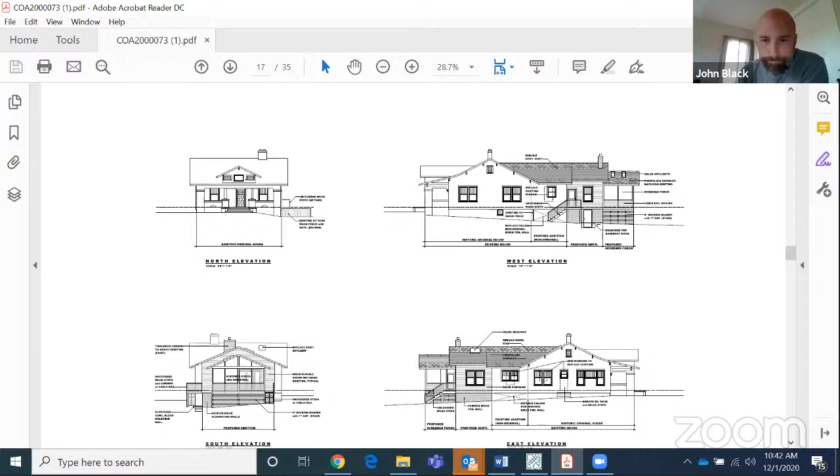For the cable railing, what was the actual proposed material you were using? I remember it was wood with wood posts, with galvanized steel conduit instead of cable railing, and it was horizontal instead of vertical, into a vertical wood post. Is there a new plan or visual to submit? The modification could be reflected in the motion, and you can provide updated plans before final approval.

Now that we're in discussion, I want to express concern - even galvanized steel pipe feels pretty clearly not compatible with the historic structure in style, material, scale, and proportion as the guidelines read. I'd love to hear what others are thinking. Sometimes we do find metal used, but it would depend on what the criteria says - you wouldn't typically find horizontal railing like that.

Yeah, I actually have more problems with that material than I would with a cable rail, because the cable is much thinner and less visually noticeable. If you had a cable rail between wooden posts, that would be, at least for me, less of a visual issue. Galvanized steel tubes are going to be more visible from Oval Drive and some of those concerns that were brought up.

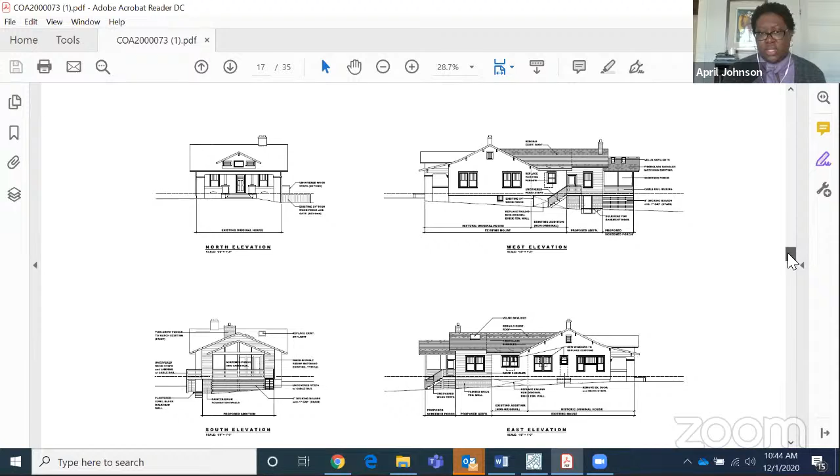And speaking of visibility, Bo, is it possible for you to show what that looks like from Oval Drive? There isn't a picture in the evidence, so I don't know how to judge the visibility. And I know we've had visibility discussions before, but do we distinguish between just visible or highly visible? Are there levels to that? We haven't had that discussion in a while, so I'm just asking the commission.

This is Andy. I was just going to add to the questions - if the property does not face Oval Drive, is there concern, or do we have purview there if the property itself does not face the street? I think we have differing levels, the way I've interpreted it, there's your character-defining elevations, as we used to use the term, which were mainly street facing.

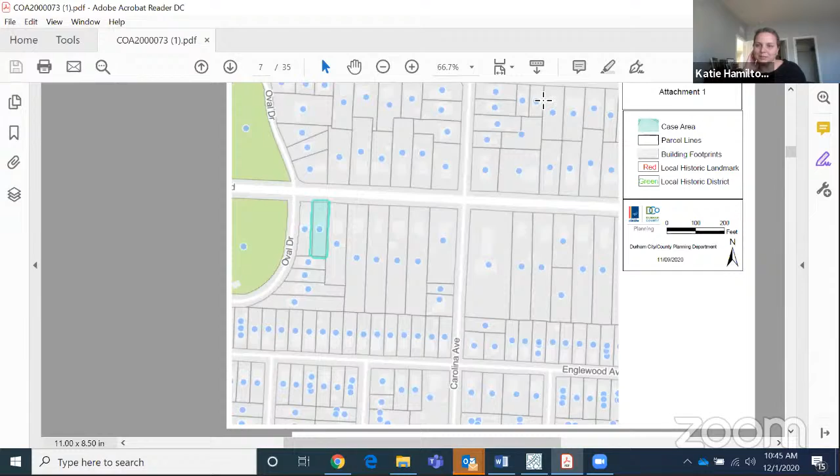Bo, can you pull it up on Google Maps? I'm looking at Google Maps and you can see the rear of this building from Oval Drive. So while I don't think it needs to be held to the same criteria and stringency as West Club Boulevard, I do think there is some visibility there that needs to be considered when we're talking about these steel pipes that are not a material traditionally used throughout the neighborhood.

To add to that, regardless of the visibility question, which is a good one, April, the local review criteria - I'm on number 5 under decks and porches - says design and place additions to or expansions of porches, stoops, and balconies on non-character-defining elevations to utilize compatible architectural details and materials. So I think the criteria apply whether it's visible or not from the club.

So now the change is in the record, and we are reviewing that - the steel pipe, the horizontal steel pipe between vertical wood posts.

What size is the steel pipe, Mr. Black? Three-quarter inch. Okay.

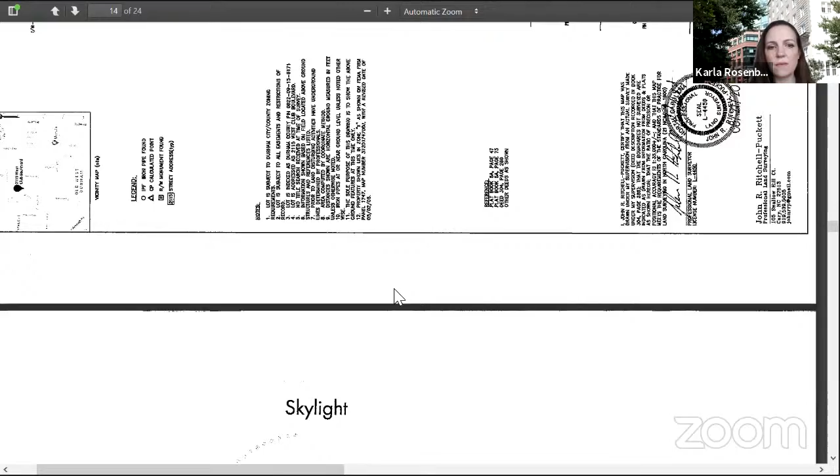Not sure how I get this smaller in this context. Can you hit control and zoom out? Yeah, I tried that and it's telling me just 80%. Did you try the little minus at the top of the screen? Usually there is one, but now my Zoom stuff is covering it. I can see the plus and minus on your screen, but maybe you can't see it. Oh, really? Oh, go ahead, Chris. Go right ahead.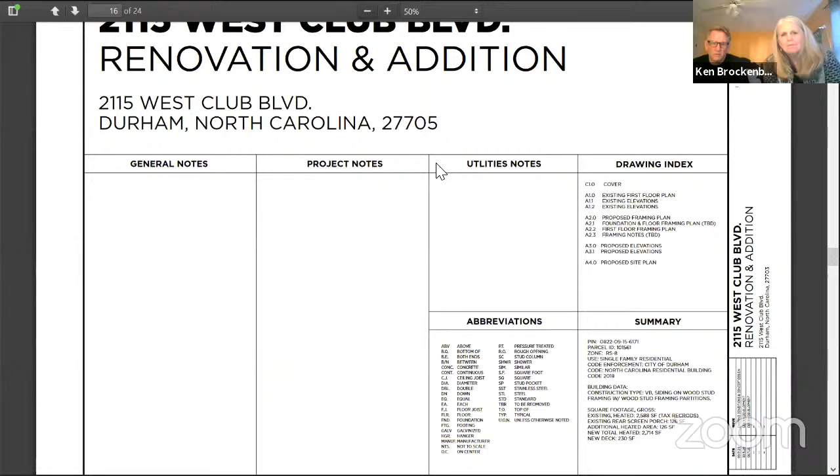Thank you. Okay. This is your existing, and your proposed. So feel free to give a brief description of what it is that you're doing, and then the commission will have questions.

Well, I appreciate your all's time. We are actually representing the owners of the house. I am her aunt and Ken is their uncle, and they are moving here from South Africa and have bought this house sight unseen. But we have been working with a draftsperson trying to figure out the best and least intrusive way of making modifications to improve the use of the home.

There is the existing screen porch. We are planning on retaining the roof line and the foundation wall, so there's no additional footprint to the home. We are planning on the window to the right of the double door, noted there, coming from the existing back wall where the kitchen is. There is a second original window in the kitchen, which we will use on the east wall of that newly enclosed screen porch.

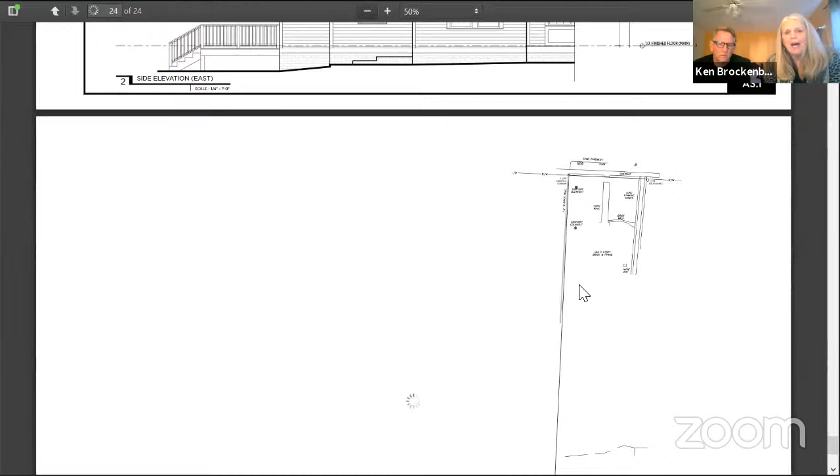So we are reusing the 2 removed windows, and then the triple bank of windows that you see on the back wall, again the south facing wall, rear of the home, are mimicking the height of a bank of windows on the west wall of the dining room. That bank of windows in the dining room has 4 windows, but we are again using the same height window. Everything would be 9/1, as is the rest of the house.

So again, the intention is to minimize the alteration to the structure, but maximize an additional 126 square feet of heated and cooled living space.

Also, we intend to utilize existing siding to patch over, to harvest the siding, to patch over the west side of the house. Likely on the back side, we may use a mimic or identical type of siding, but so that it would all be consistent with itself on the back wall of the house.

And the skylight, at this point, we are not planning on installing. So that's a change as well. Okay.

Thank you for presenting those changes and the initial application. Did any commissioners have any questions for the applicants? All right, hearing none, was there anyone else here who wishes to speak for or against this case?

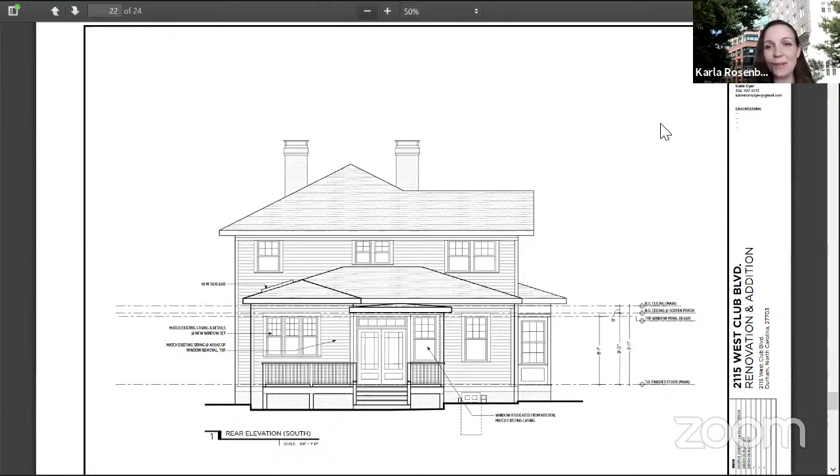Karla Rosenberg, Planning Department: Staff would recommend approval of this application. Thank you, Karla. And then Matt, were you planning to make a motion? Sure, I can be the motion guy again.

Vice Chair Bouchard: The Durham Historic Preservation Commission finds that in the case COA 2000075, 2115 West Club Boulevard, addition and modifications, the applicant is proposing modifications and an addition to a contributing structure. An original rear porch will be converted into conditioned space with painted wood lap siding, 6-inch pine, to match the rest of the home. The existing porch screen door will be replaced with double doors in an expanded opening. The doors will be styled similar to the original front door. Two original windows will be relocated from the home's rear elevation to the side and rear elevations of the addition. A trio of new 9/1 windows will be installed on the home's rear elevation left of the addition. A wood deck, 22 feet long and 12 feet deep, will be constructed immediately behind the addition.

Therefore, the conclusion of law is that the proposed addition and alterations are consistent with the historic character and qualities of the historic district, and are consistent with the historic properties local review criteria, specifically those listed in the staff report. The Durham Historic Preservation Commission approves the certificate of appropriateness for case COA 2000075, 2115 West Club Boulevard, addition and modifications, with the following conditions: 1, the improvements shall be substantially consistent with the plans and testimony presented to the commission at this hearing and attached to the COA. 2, the improvements may require additional approvals from other city or county departments or state or federal agencies; the applicant is responsible for obtaining all required approvals relating to building construction, site work, and work in the right of way. And 3, a compliance inspection shall be performed immediately upon completion of the work approved herein.

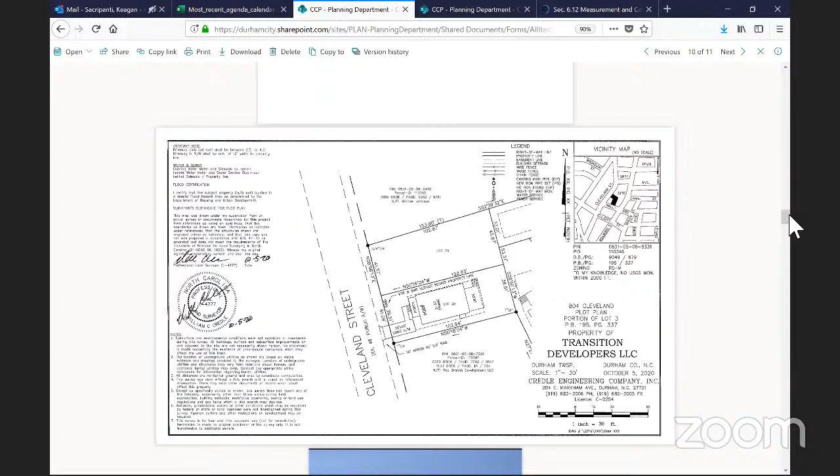Floor plans the same. I started renovating about 10 years ago, starting with old historic homes, and I try to build my houses how they were built in 1900. All the exterior materials, I try to incorporate older historic home elements, and that's pretty much it, I guess.

Thank you. Is there anyone else here to speak for or against this application? All right. Were there any questions from commissioners for the applicant?

So you're saying this is specific to what on Credle's plan is being shown as lot 3A, correct? Yeah. It's number 804. Well, yeah, 804. Yeah, the new address would be 804 Cleveland Street.

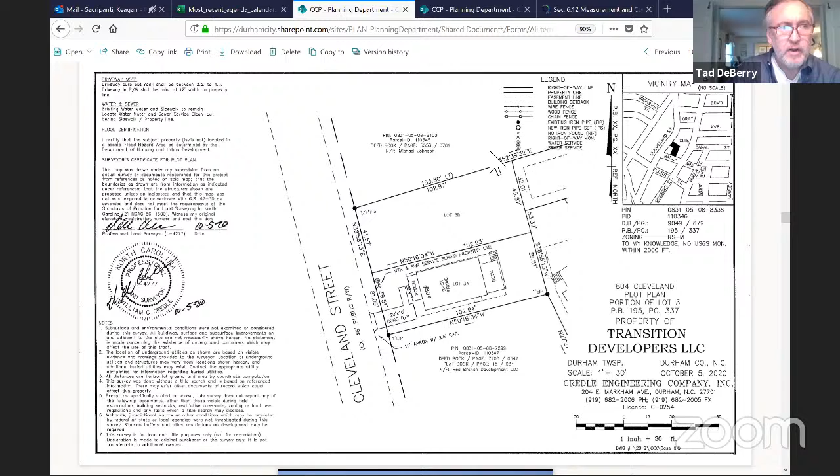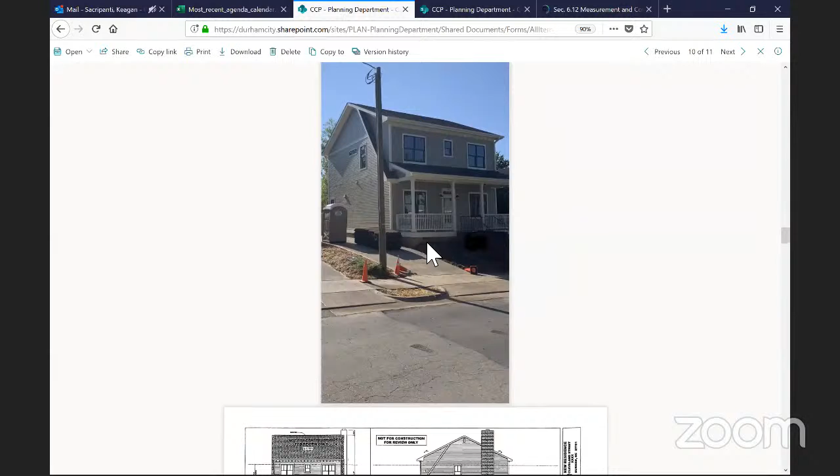Got it, thank you. Mr. DeBerry, I appreciate that you have done two different facades on essentially the same house next door to one another. Have you built these exact same facades elsewhere? Yes, sir. 808, 806 North Elizabeth. I did one on Glendale that's like 804, the case we're hearing now at this house. I built this style about 3 times, 2 with the same floor plan, 1 with a different floor plan. Okay, thank you.

Were there any other questions for the applicant on this application? Vice Chair Bouchard with a quick question about the walkway. Mr. DeBerry, my understanding is it's far more typical in this district for walkways to connect directly to the sidewalk, and it appears from the plans we received that won't be the case, the walkway to the front door connects to the drive. If you could explain why that decision was made, and let us know if it would present a hardship to redesign the walkway to be more consistent with the historic character of the district.

Yeah, well, of course, I made the driveway, the approach and the driveway for 2 cars. And I think I adjusted it a little bit where we took the walkway to the sidewalk. It might not be directly in front, like a straight line, it might be a little offset. I'm willing to do that. I think I sent it to Karla, because that was a question. The city had a couple comments from my original proposal to help meet all the standards within the historic district, and I proposed taking it directly to the sidewalk.

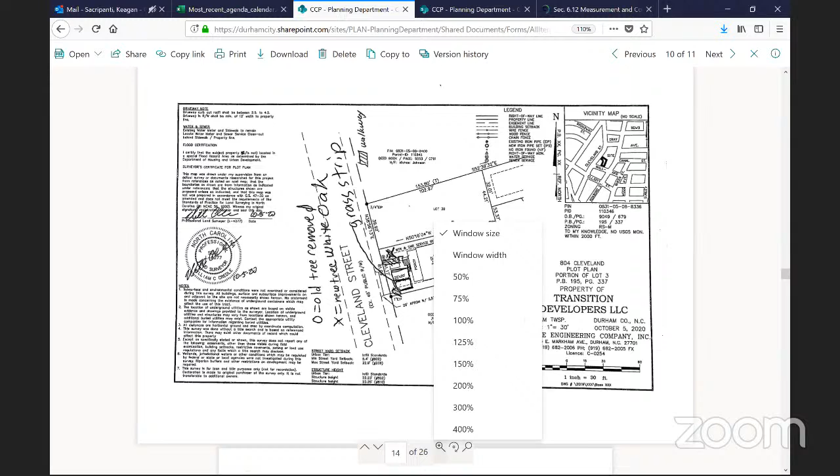All right, there we go. I think this is what Mr. DeBerry's describing. If you zoom in, there's a hatch pattern on a sidewalk closer to the north side of the property. I think that's the sidewalk you're speaking to, correct, Mr. DeBerry? Yes, sir. Yes, sir.

Yeah, my bad for not seeing that revised site plan before now. Thanks, Andy. No problem, it was buried deep in there.

Are there any other questions for the applicant from the commissioners? Okay, hearing none, I think we can close the public hearing, and then move to discussion amongst the commissioners.

I think it's the same discussion as about the accessory dwellings. It does bring me comfort that the houses, though they exist somewhere in Durham, they're outside of the historic district and somewhat apart from each other. Yeah.

Well, and you see it in the historic districts too, where they would have done the same unit in multiple places. It's just how many of them really comes down to part of the question, and are they all right in a row, and will they affect the character of the district itself?

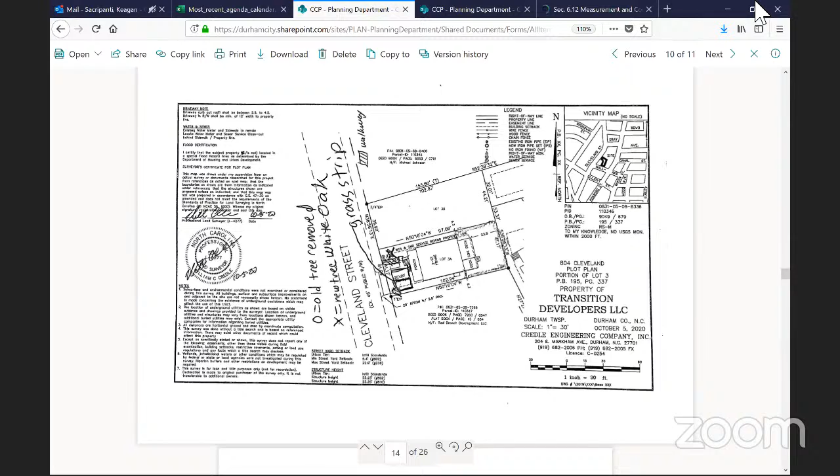Second. Okay, with the motion being made by myself, Chair Hamilton, and seconded by Commissioner Goolsby, can we get a roll call vote, Madam Clerk? Vice Chair Bouchard, approved. Commissioner DeBerry, approved. Commissioner Fieselman, approved. Commissioner Goolsby, approved. Chair Hamilton, approved. Commissioner Johnson, approved. Commissioner Krager, approved. Commissioner Waiters, approved. Motion passes 8-0.

And with that, we will now move on to the second case that this applicant has brought before us today, which is case COA 2000082, 806 Cleveland Street, new construction. Keegan, can you please present the staff report?

Just a sec. Also, a point of clarification to city attorneys: does Mr. Perry need to consent to the oath and the digital hearing for this hearing as well as the previous one, since they're separate hearings?

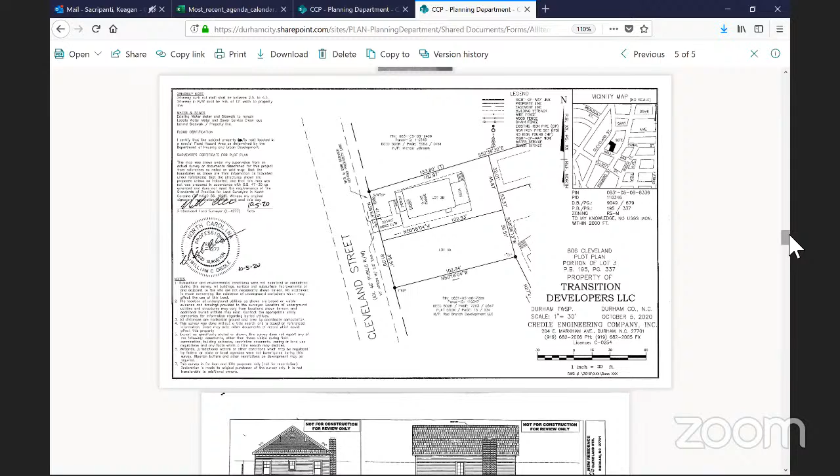Were there any questions, or was there anyone else here to speak for or against this case? Hearing none. Were there any questions for the applicant from commissioners? Just a quick one from Vice Chair Bouchard: similar question about the walkway and driveway. I don't see a revised site plan with this COA. Is the intent to make similar changes, and if so, will a revised plan sheet be submitted? Yes, it will be pretty much the same thing. I thought I sent one, but I can submit the same proposed changes as the other 804 Cleveland. Yes, sir.

All right, thank you. I have a question for staff. Both motions in the previous case and this case mention replacing the street tree. Does that need to be included in both, or should it only be included in one since it's only one tree? I guess that's another point of clarification - it is only one tree between the two cases, right? Keegan Sacripanti, City-County Planning Department: both application material sets mention the tree, so I included it in the staff report for both, but looking at Google Street View, it looks like there's just the one tree, so it may not necessarily need to be included for the COA for lot 3B. It looks like all of that work is within lot 3A, so I think we can strike that from this motion.

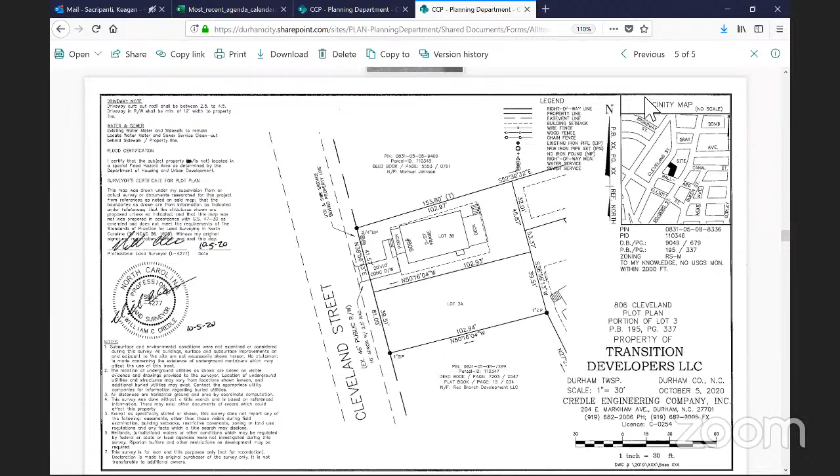So we could say like, sorry. I sent it to Karla. I can email it to you now, Keegan. I sent it to Karla, the proposed changes - Carla Rosenberg. Okay, if you can send that to Keegan, I'll send it to you. Okay, that'd be great.

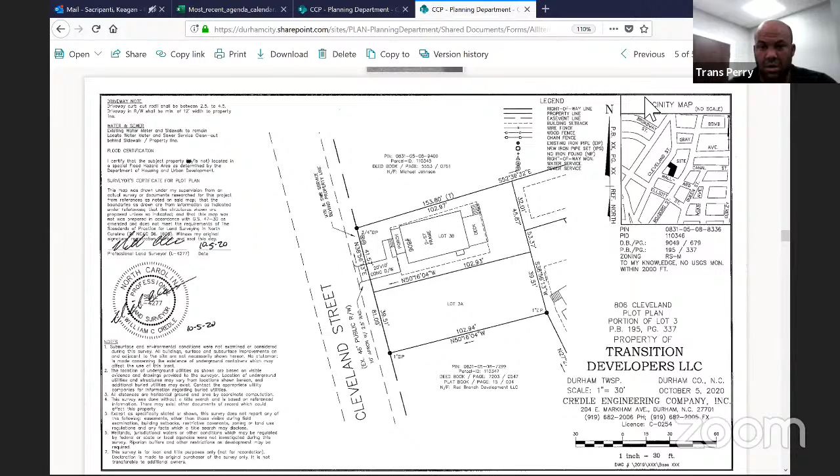Katie, when you're ready for it, I have a motion. Staff, do you have a recommendation on this? Yeah, I recommend approval with the conditions discussed. Thank you. And then, Andy, I am willing to entertain a motion. Okay.

The Durham Historic Preservation Commission finds that in case COA 2000082, 806 Cleveland Street, new construction and site work, the applicant is proposing to construct a new primary structure with associated site work. The applicant is proposing to remove an existing chain link fence and replace it with a new dog ear style wood fence around the rear yard. House construction materials include cementitious fiberboard siding, wood composite siding, polyvinyl chloride PVC trim, architectural shingles, and pressure-treated lumber. The front porch will be constructed using grade 1 pressure-treated lumber installed flush. Windows will consist of 2/1 aluminum-clad wood windows. A paved concrete walkway and driveway will run perpendicular to the street and connect to each other.